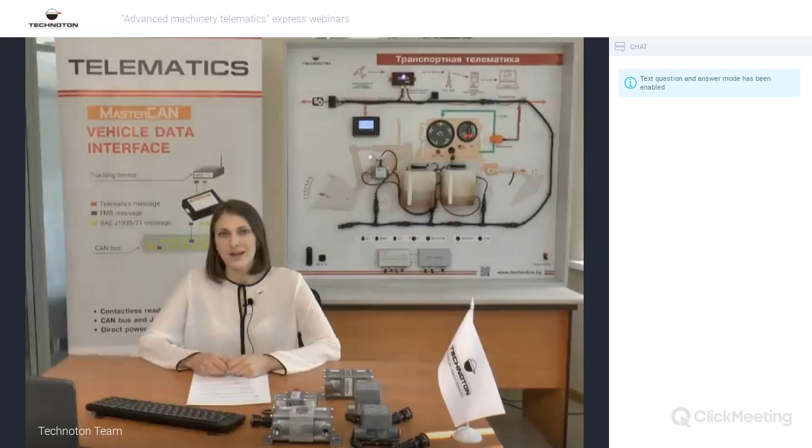Maybe you missed some previous webinars, so I will remind you. Technoton is a manufacturing company of fuel flow meters, fuel level sensors, axle load sensors, and other equipment in CAN bus. We continue our topic, and today I will talk about DFM fuel flow meters.

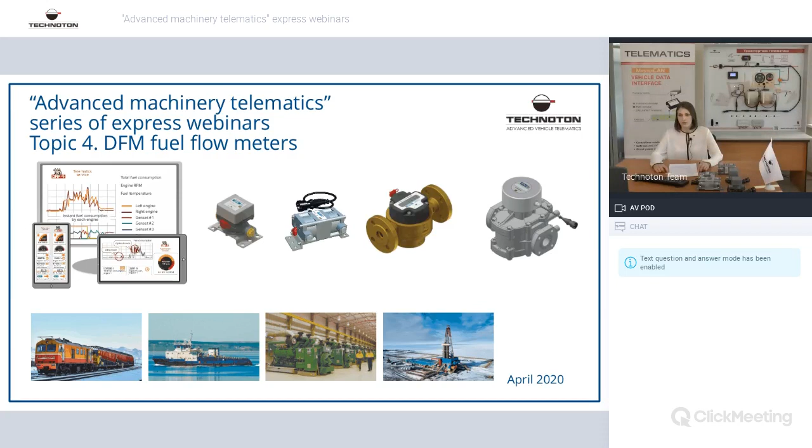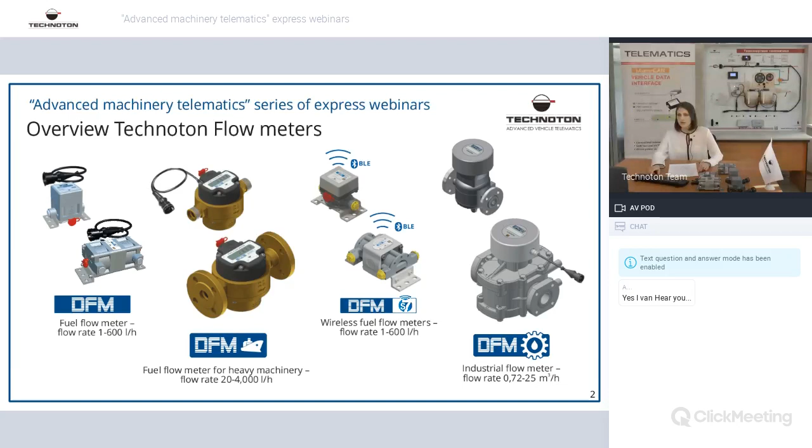I will talk today about fuel flow meters. On the previous slide, you can find the whole line of our fuel flow meter product lines. I will talk about the first part, small and differential fuel flow meters up to 600 liters per hour. But we also produce DFM marine wireless fuel flow meters, BLE, and also DFM industrial. About other lines, we will talk on Friday and further in our online webinars.

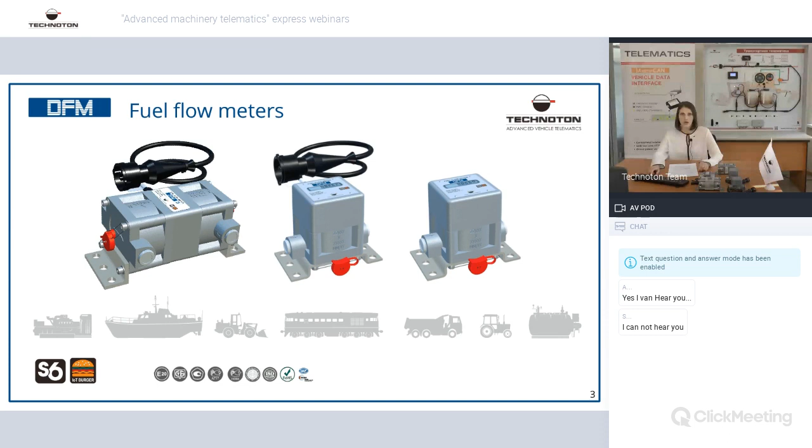Differential fuel flow meters and one-chamber flow meters here. It can be autonomous and with output interface: Pulse, CAN, Modbus, RS-232, RS-485, and others.

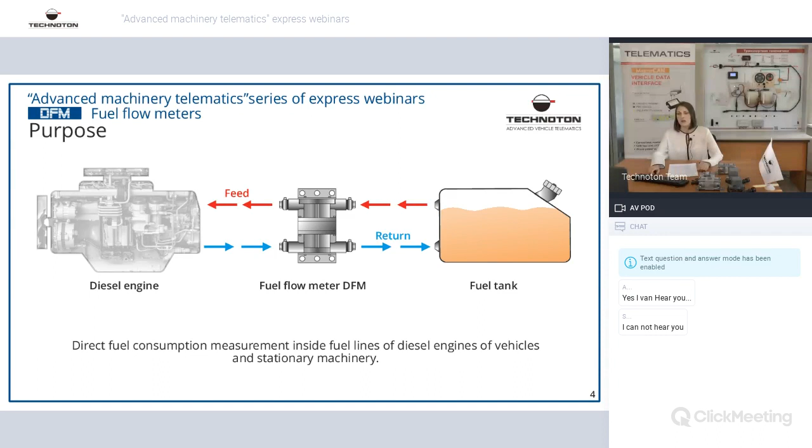The purpose of all fuel flow meters is to measure fuel consumption directly in engine lines, because the fuel flow meter measures the engine fuel line as a feed going from tank to the pump of the engine, and also the return line going from the engine back to the tank. Not mathematical calculation, everything direct from the engine.

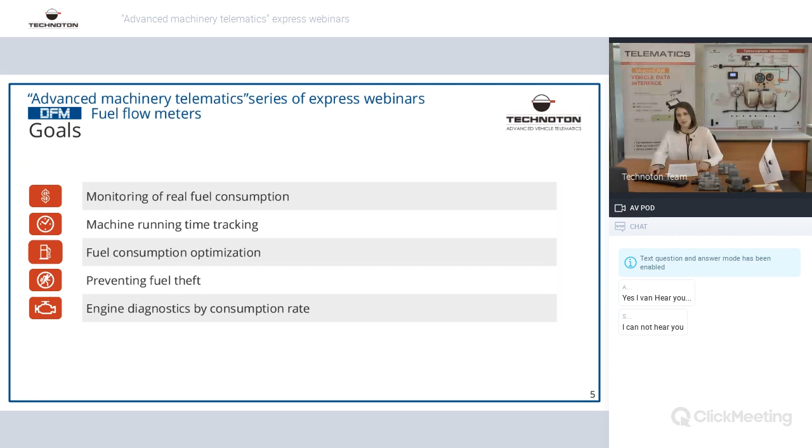The goals are to monitor real fuel consumption, machine running time tracking, fuel consumption optimization, preventing fuel theft, engine diagnostics by consumption rate.

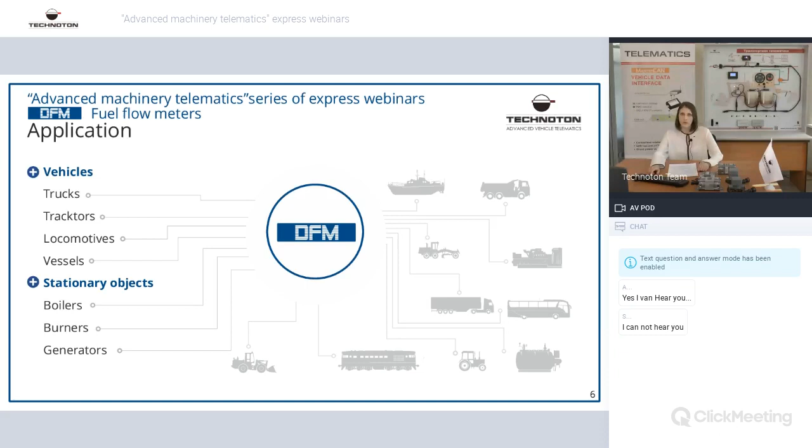Application of fuel flow meters you can find actually everywhere. Lots of cases: machinery, vehicles, vessels, all of them have diesel engines. Even on our website, you can find cases with descriptions where DFM is already installed in trucks, tractors, locomotives, vessels, stationary equipment like boilers, burners, generators.

Advantages of fuel consumption measurement - there are a lot of advantages, and for you as partners, a big opportunity to make sales and open new markets for your business. Direct consumption measurement in fuel lines of the engine means it's not a mathematical calculation like CAN bus auto vehicle data. Everything is measured directly from the engine itself.

Accurate data regardless of vehicle position and fuel tank shape. Really, for example in buses there are so crazy shapes of fuel tanks, and sometimes it's so difficult to calibrate accurately in order to get accurate data. That's why it's much easier to install a flow meter on the engine and get precise fuel consumption, and compare with fuel fillings and fuel thefts.

Even in position, for example in mining applications, when mining or construction equipment is working stationary without moving for a long time, fuel level sensors will not get and provide accurate data because the fuel level is not changing, but fuel consumption is changing.

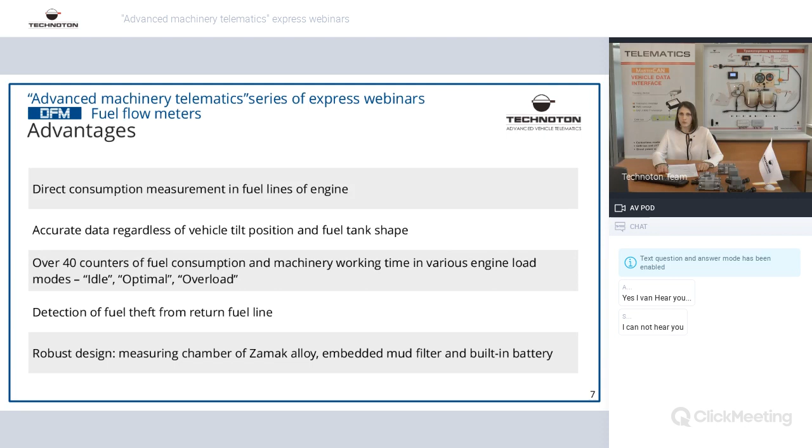Robust design, measuring chamber of zinc and aluminum alloy, also embedded mud filter and built-in battery.

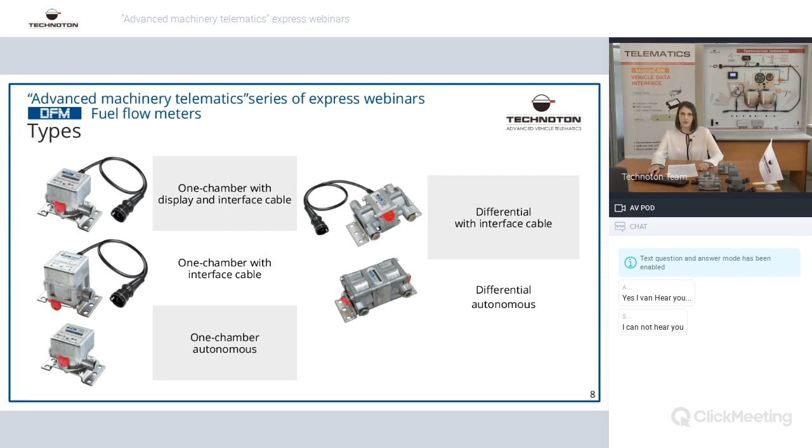Different types of fuel flow meters: one chamber flow meters with interface or without interface, with inbuilt display or without inbuilt display. Also differential fuel flow meters, as well as with interface and without, only with display.

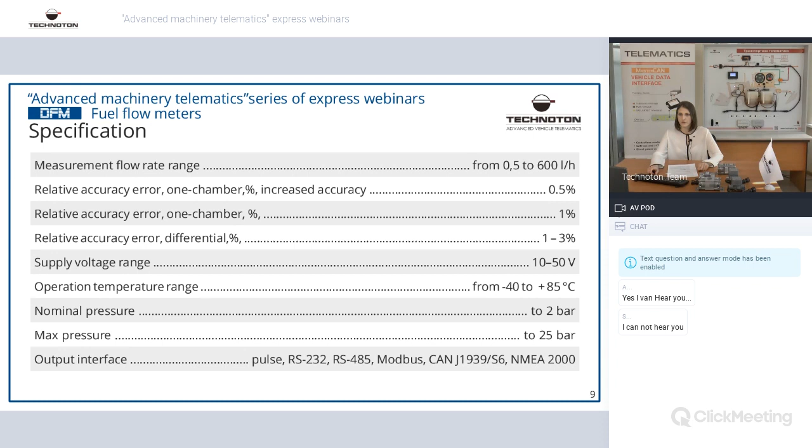How to order fuel flow meters according to identification codes. Not so difficult, I believe, for you, but I will explain a little bit deeper here.

X means fuel flow rates up to 50, 100, 250, or 500 liters per hour. Also available, 600 liters per hour.

Y means model without display, with display, or with display and extended functionality. For example, besides fuel consumption, you wish to see engine working hours directly on the display.

D and Z: D means differential. Z means interface - we can offer pulse interface, 232, 485, also including Modbus and CAN interface. I will talk deeper further about specification and advantages of different interfaces.

An increased accuracy version is provided with special letter U, and P means, for example, HP modes. It's with a higher fuel flow rate, up to 600 liters per hour. It's available for differential fuel flow meters.

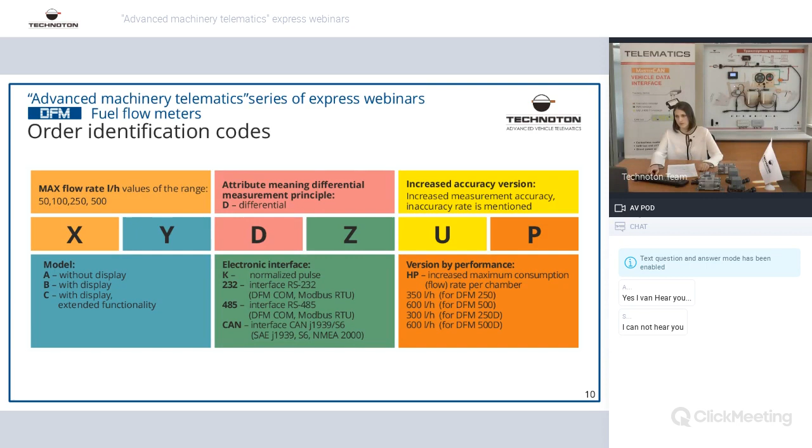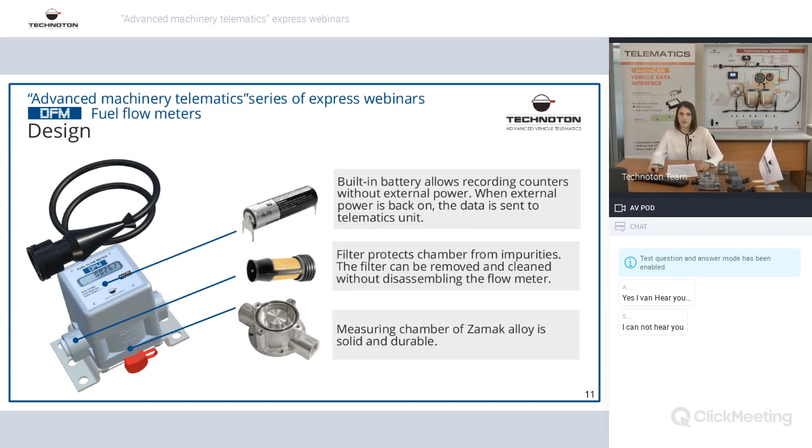Let's go further into DFM fuel flow meter design. We have versions with display and without display. Those models that have a display also have an inbuilt battery inside. All fuel flow meters have a mud filter that can be cleaned after it gets dirty. The measuring chamber is durable because of special alloys, covered with special material that gives durable working during the whole lifetime of the fuel flow meter on engines.

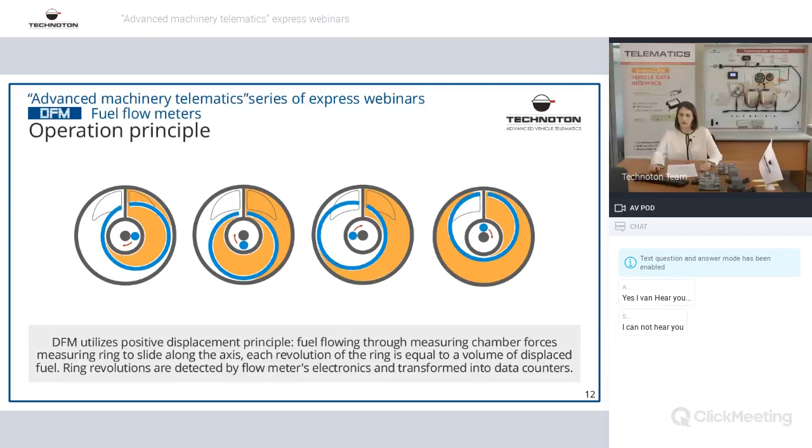The operation principle is pretty easy to understand. DFM utilizes the positive displacement principle - fuel flowing through measuring chambers forces the measuring ring to slide along the axis. Each revolution of the ring is equal to the volume of displaced fuel. Ring revolutions are detected by the flow meter's electronics and transformed into data counters. In simple words, it's a ring principle movement, not turbine or other specifications you can find in bigger flow meters, available in further webinars.

Technology S6 - we developed the S6 network, called by our brand S6. It allows connecting up to 8 flow meters into a complete line. Very convenient on a vessel, for example, or several generators. It's possible to combine all flow meters into one line only when using CAN devices. We even developed new functionality besides 8 - we can connect 16 flow meters into one line, meaning 8 or 16 engines will be functioning in one place, with one connection to power and also one connection to a telematics device by CAN port.

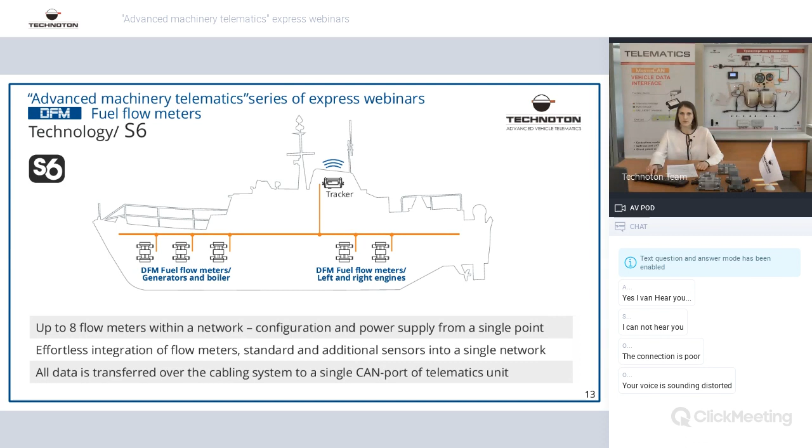Technology IoT Burger - probably you already know from previous presentation webinars that all our products are developed based on IoT Burger technology. It means onboard data processing, so all data is processed directly on the electronics of DFM fuel flow meters. 40 counters and even more are saved in internal memory and transferred over CAN signal to the telematics device.

Detection of interference and tampering, ignition on/off, and other events like errors are saved in a special journal, so you can see if someone is tampering with your device or interfering with the operation of the vehicle or DFM. Self-diagnostics and saving error codes in an events journal - those codes are also transmitted online via CAN interface to the telematics device, so there's no need to go on site to see what's wrong with the engine or fuel flow meter.

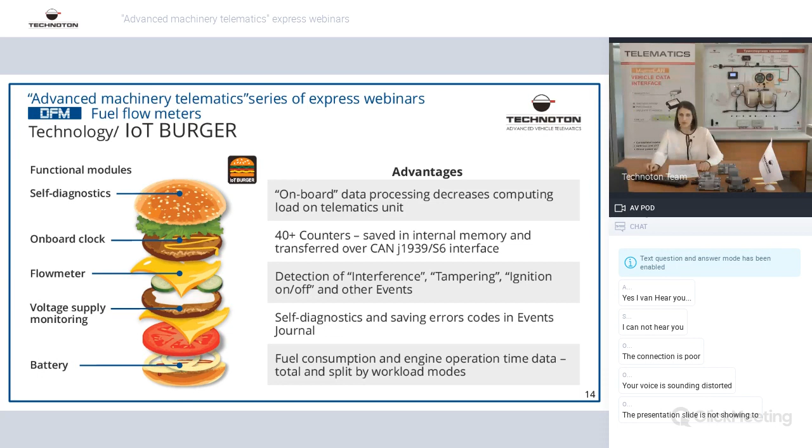You can see everything online. Fuel consumption and engine operation time data, total and split by workload modes - you can divide fuel consumption by different working modes, and operation times will also be divided into idling, optimal, or overload modes, plus modes like tampering and interference.

Going further, what we can find on the display of fuel flow meters - a lot of parameters, actually. Here we can see 14 parameters: total fuel consumption counter, engine operation time. I believe everything important to know about fuel consumption is shown.

Working hours - you can also see everything in high resolution data, and it's also clearable counters to see data per period of time or type of operation. At the beginning you clear, and at the end of the day or working time, you see the fuel consumption and engine operation time. Besides main counters that are saved all the time, there's instant fuel consumption and total fuel consumption during the whole work of the fuel flow meter.

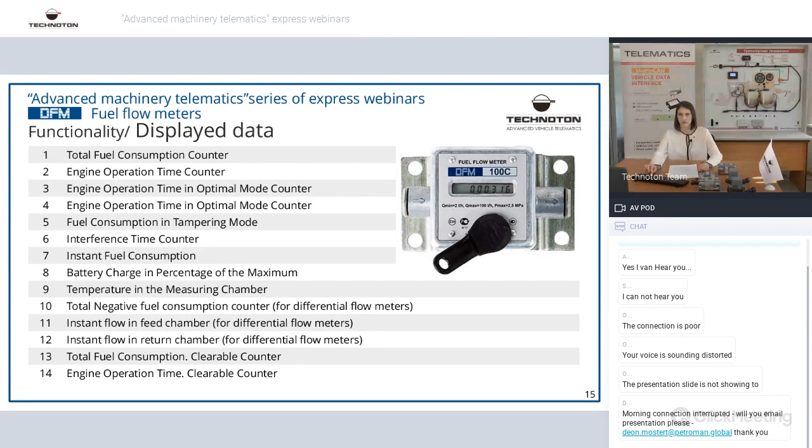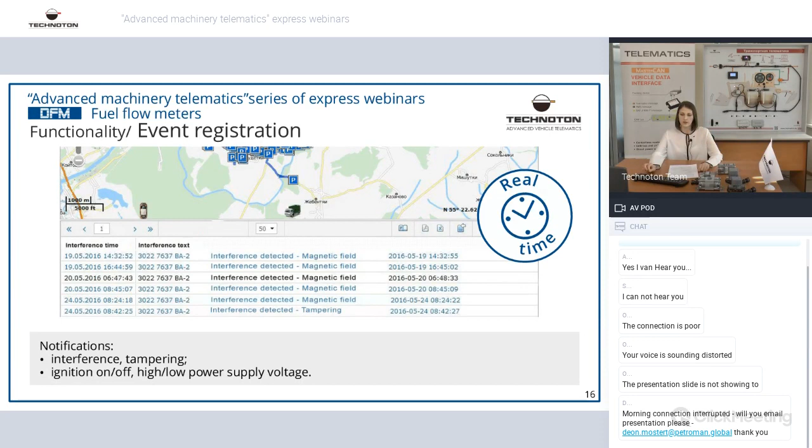Event registration, as I already said - if something goes wrong with DFM, interference occurs, or tampering or errors happen, DFM sees and saves events into its special journal.

Protection from interference - let's imagine what interference can appear. Interference with magnet: number and duration of attempts - this data will be provided by DFM. Tampering: artificial flow volume and duration of tampering attempt. Negative consumption: also artificial flow volume and flow duration through the return chamber. Those counters are saved in the internal memory of DFM, and if you're using CAN interface, it will be provided to your telematics device via CAN network.

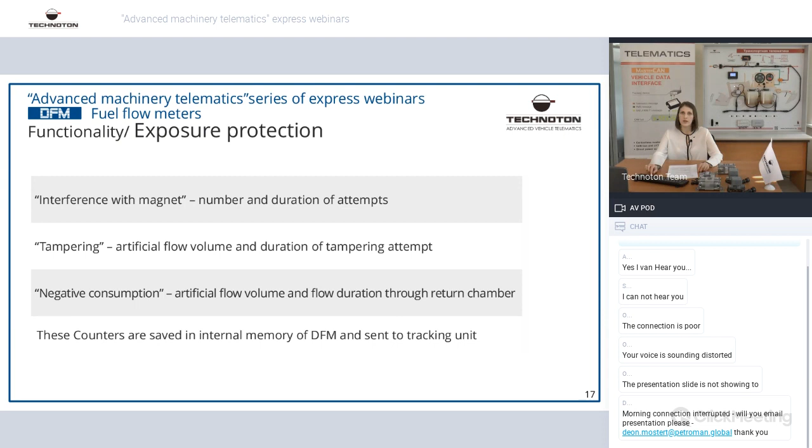How do fuel graphs look in telematics software? Of course every software has specific configuration, but if you create fuel graphs from fuel flow meters, it will look similar to this slide: instant fuel consumption, and besides this graph, total fuel consumption with green and orange lines, or maybe brown to someone.

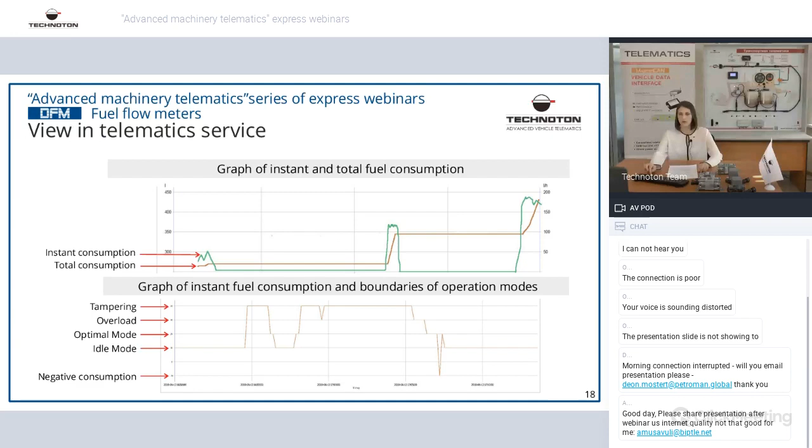As you are getting data about other modes like tampering, overload, optimal, or idling, you can create also graphs specifically for these modes of engine.

Let's compare some interfaces on DFM. As I mentioned, DFM fuel flow meters can be with pulse interface, RS-232, 485, and also CAN. In case with pulse interface, you will get only pulses. Based on pulses, you will need to calculate fuel consumption and engine working hours, so nothing more, and other parameters will be saved only in DFM itself.

To see them, you will need to get to site, attend with the service kit, and see internally the memory of DFM.

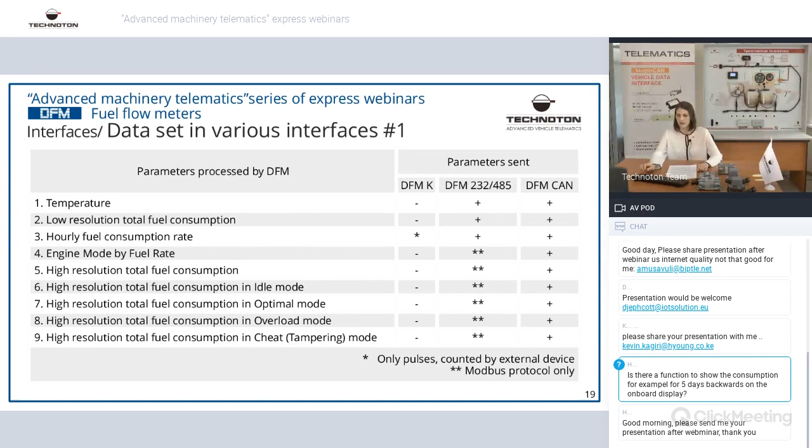But the most advantages are on CAN interface. Actually CAN interface provides all counters and all parameters online. Even though it's saved directly on the electronics of DFM, those counters are also sent and provided to the telematic device online. No need to go on site to see something deeper, even errors. It's very convenient.

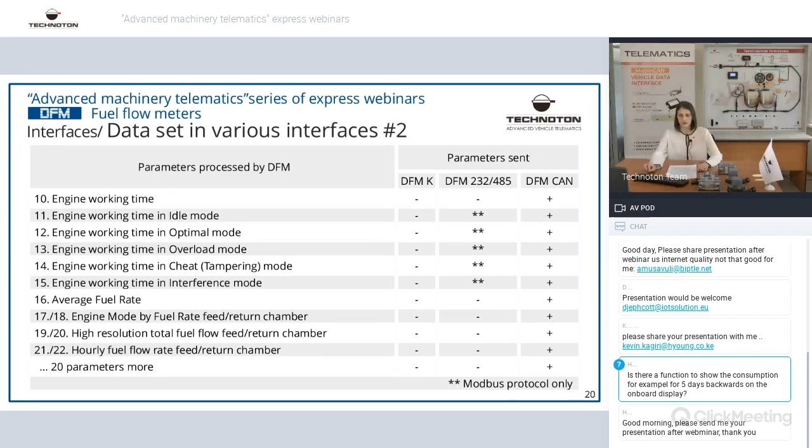And on CAN interface, it's also easy to integrate with new telematic devices. I will talk later at the end of this presentation about compatibility with devices.

Our product is a wireless DFM fuel flow meter. Interface is BLE, Bluetooth communication. Really convenient in installation and configuration. It saves time when you use it, you no need to use a cable.

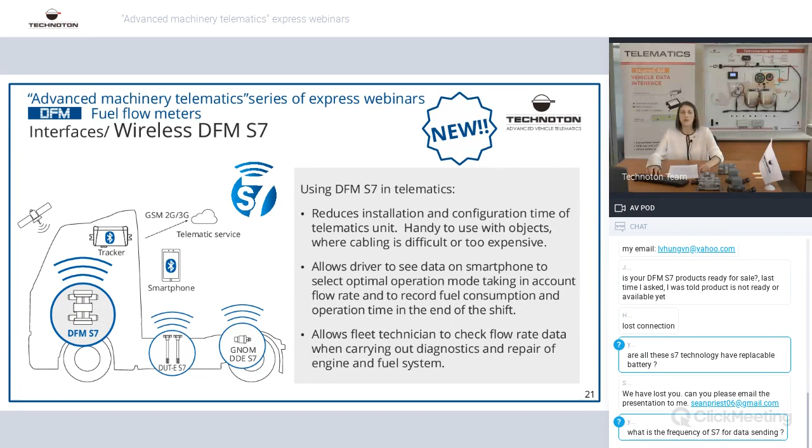It allows the fleet technician to check the engine and fuel flow meter easily on site. It means no need to connect a service adapter and connect to PC, upload a special program. You just connect with your tablet via BLE and see the fuel flow rates, counters, etc. on the DFM itself.

Selection according to high pressure pump: as you know, different engines have different pumps, and it's not easy, sometimes not possible at all, to install a one-chamber flow meter. In this case, you will need to install only differential fuel flow meters. I would say differential will work everywhere, and it's easy. Even on small or bigger engines, differential measures fuel consumption difference between feed line and return line and transmits to the GPS tracker.

But for example, on unit injector fuel system and common rail system, you will need only differential. It's not possible to install a one-chamber flow meter there.

In some old and simple engines, like with inline pump and distributor pump, it's possible to install a one-chamber flow meter. Sometimes it's lower cost than a differential flow meter, in case you are able to modify the fuel system.

When I'm talking about modifying the fuel system, it means you need to circle the fuel lines, so the feed line will not go back to the tank, it will go again to the pump. Fuel will be circling inside these small lines around the engine, around the pump. That's why it means you need to modify the fuel system, the fuel lines.

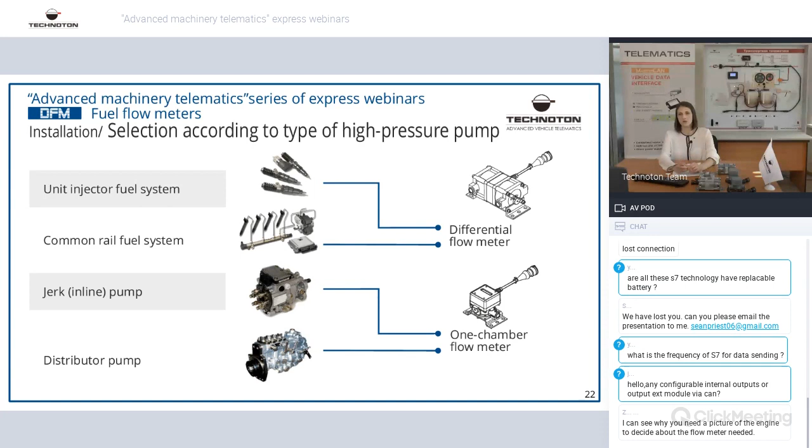Let's go further. Hope you are not tired of my talking.

About mounting kits, we provide different mounting kits specifically to DFM models, and we help find special adapters according to your fuel lines, because engines have fuel lines with different sizes and threads. Sometimes mounting kits are universal, sometimes not, but we do all the best to provide reliable mounting kits.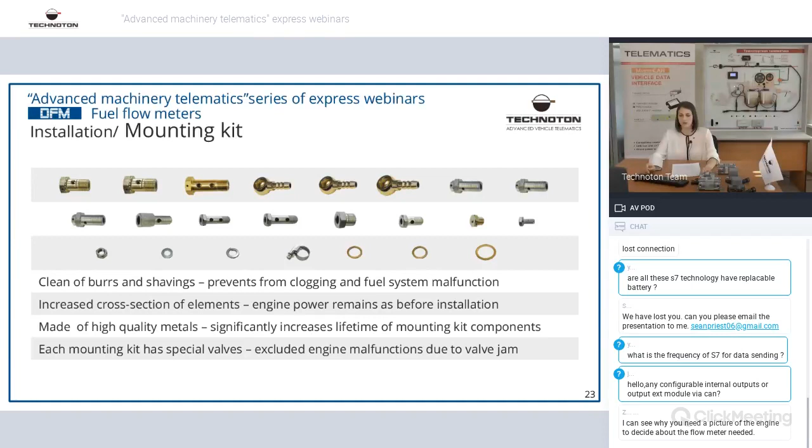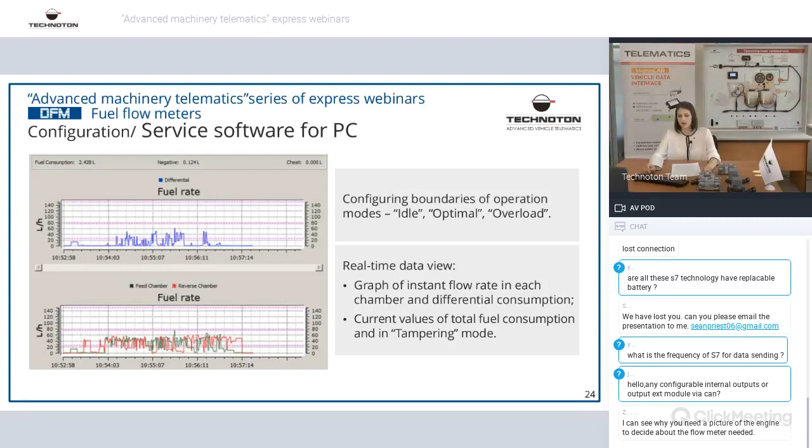It actually protects you from wrong installation. When you see no air bubbles and no crazy fuel lines on these graphs, it means the installation is done accurately and your customer will be satisfied with the functionality of the fuel flow meter further on. That's why at the beginning of purchasing one device, we always recommend using service software to protect you from wrong installations.

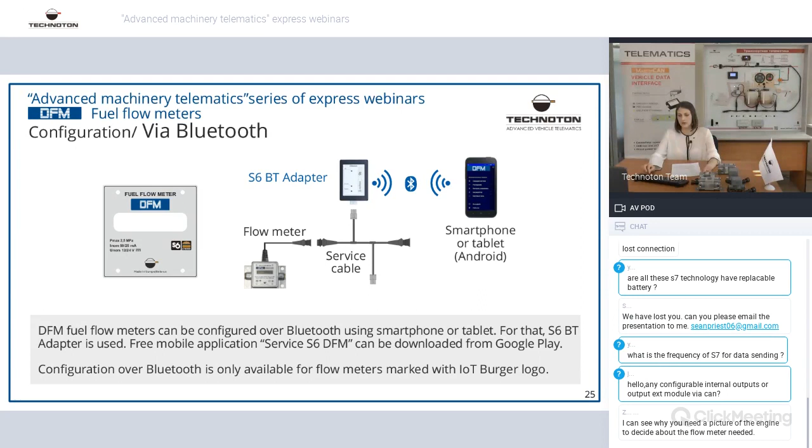Service kits can be with a cable connecting to a computer or with BLE connection — it's just a Bluetooth adapter to computer, or with a phone adapter, as you can see.

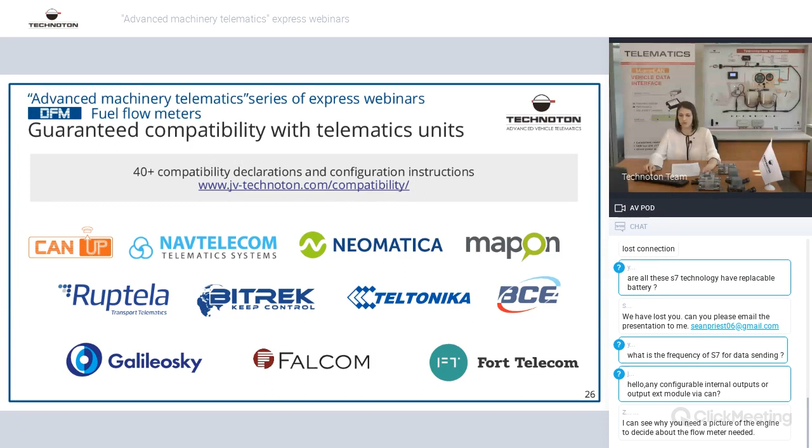Compatibility with telematic devices: lots of telematic devices you can find here already compatible with our products. But besides that, we can easily make compatibility with new devices based on CAN interface, because CAN interface is universal, based on the J1939 protocol, so new compatibility goes really easy.

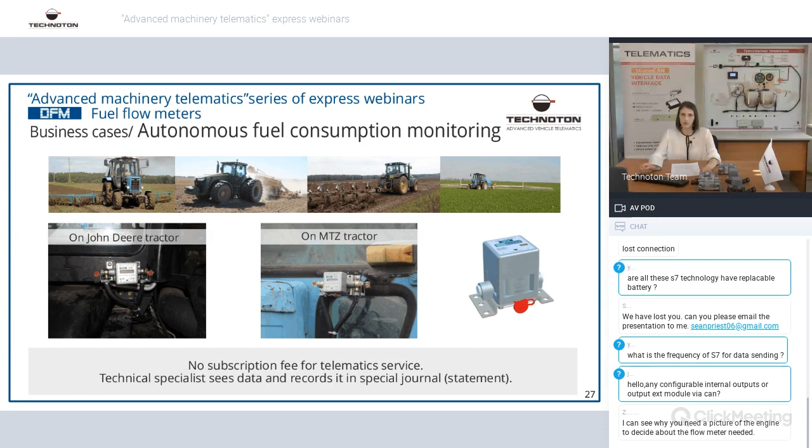Autonomous fuel consumption monitoring. Here you can find examples on tractors, John Deere and MTZ. No need to use even a telematics device — you can install an autonomous flow meter and see operation time and fuel consumption directly from the engine using a screen and magnetic key to switch from one screen to another to see the data. We call this seeing data offline.

When talking about telematics, you can use the DFM fuel flow meter in one network. For example, in vessels, you attach different engines and several fuel flow meters into one line, and on our software you can create a dashboard. We call it an online dashboard, and simultaneously you will see the running of several engines at one time.

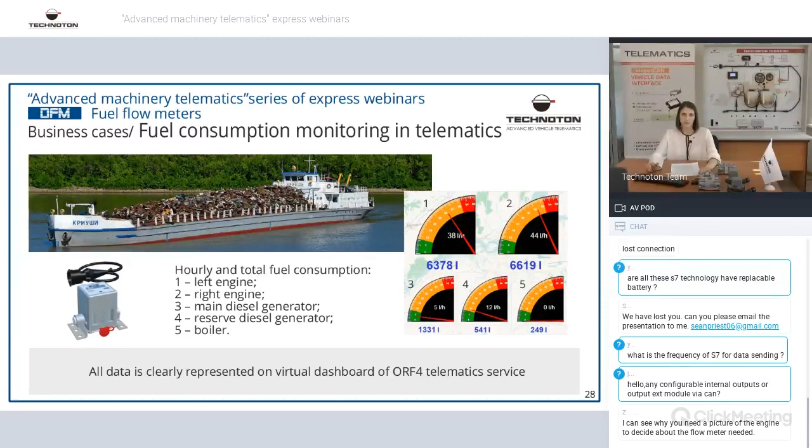So fuel consumption and engine hours are shown on one screen. You can see the green, orange, and red indicators on the right side of the slide. Of course, if you wish to see in reality how it looks, we will show it in our software. Even in the demo version some parameters are already available, but to go further for the online dashboard by managers, it can be done and provided to you as an example.

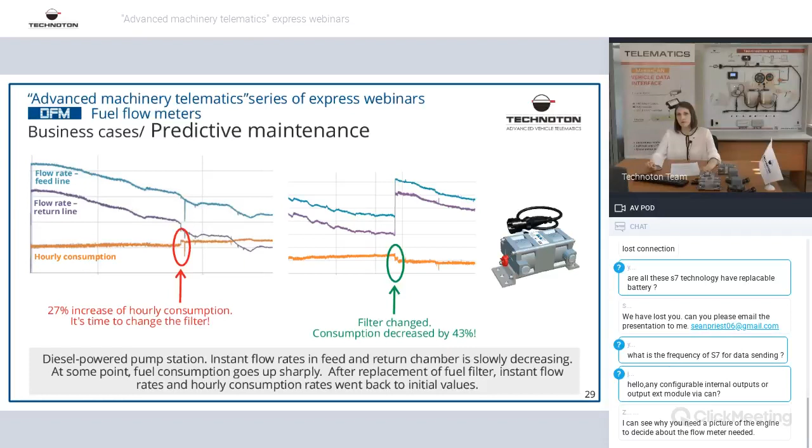So let's make a summary of our presentation. We were talking about accurate fuel consumption and engine operation time. With the DFM fuel flow meter, we can see total fuel consumption divided into different modes like idling, optimal, and overload modes, additionally with tampering and interference detection. Operation time of engine and fuel pump is also divided into separate modes.

Secondly, we were talking about protection from interference — all events are recorded by DFM memory, and some errors are provided online to the telematics device. We were talking about S6 networks that allow you to connect up to 8 fuel flow meters into one line, or even more — it was recently developed that our network now allows connecting up to 16 fuel meters. And of course, if you wish to add fuel level sensors, that's also available with the S6 network.

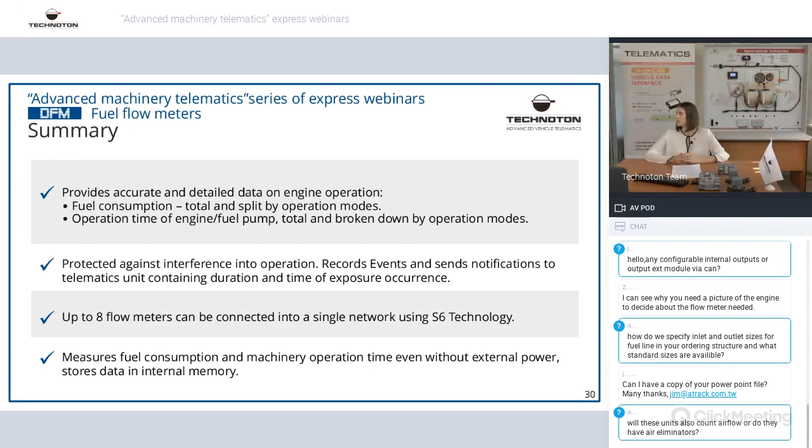Well, I believe that's all. Please pay attention to the last slide. Here are our different websites, and really, I believe there are lots of them.

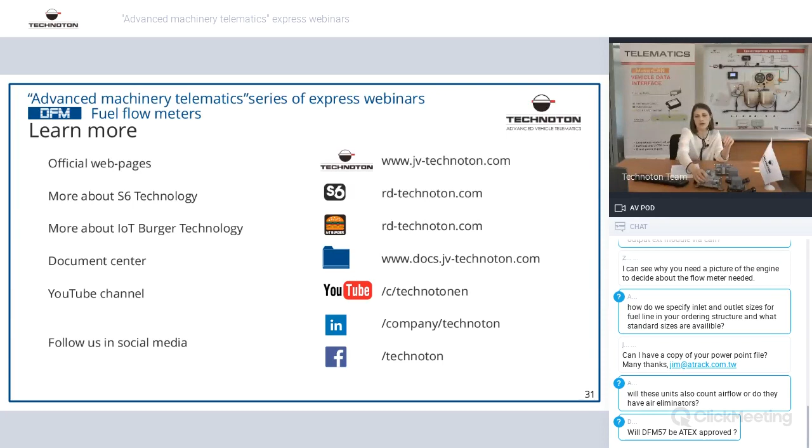Maybe I didn't show you fuel flow meters, for example how they look in reality. Wireless BLE fuel flow meters - I will show you just an example. A 3D view you will find on our website.

Small differential 100 with interface, and one chamber flow meter. It looks like this one. I believe you see it.

So let's proceed with your questions.

Is the Bluetooth battery replaceable? To be honest, I'm not sure how to reply accordingly on battery replacement, because we need to look at the electronics dashboard, and I'm not sure that it will be allowed to replace the battery itself. But I will talk to our technical guys and confirm it later about battery replacement exactly on the Bluetooth version.

Is there a function to show the consumption, for example for 5 days backwards, on the onboard display? Yes. Imagine DFM has a counter with total fuel consumption. Besides that, it has a counter that is resettable, or in the presentation it was said clearable. It means that at the beginning of 5 days you clear this counter and see fuel consumption data at the end of 5 days - it's like a 1 week functionality. But the main counter, total fuel consumption, will be saved as well.

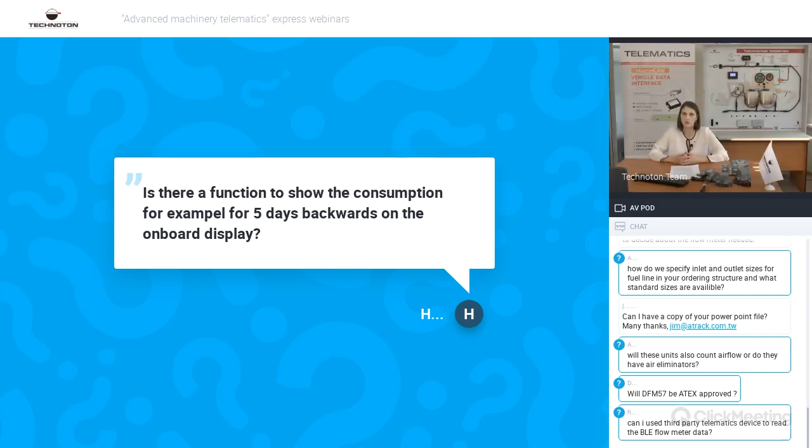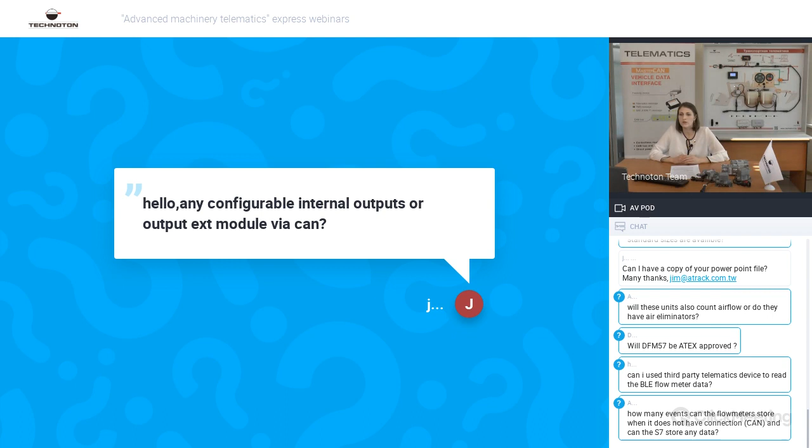Any configurable internal outputs, or output to an external module via CAN? Well, I don't understand this question clearly - probably we'll talk later more deeply with this guy, Jose. But I would comment that the CAN interface is universal, based on the J1939 protocol, and the output is also configurable. You can use messages and parameters as you wish, not all of them - there are 40 and more, even up to 3,000 parameters - but you can configure the parameters that you need specifically. Probably this question means exactly this about configuration, I believe. So we will talk with Jose later.

How do we specify inlet and outlet sizes for fuel lines in your ordering structure, and what standard sizes are available? I will comment and reply here. We have different sizes of fuel flow meters. Let's talk about differential fuel flow meters. One differential fuel flow meter is DFM 100D, 100 liters per hour, and the size of this chamber is 5 millimeters. Another type is DFM 250D, maximum 250 liters per hour, with the internal chamber size of 12.5 millimeters. The third type is DFM 500D, 500 liters per hour, with internal chamber size of 20 millimeters. Even on the DFM you find lines, for example feed line and return line, so it's easy to understand which chambers should be connected to the fuel lines of the engine. Not so difficult to mix up, I believe.

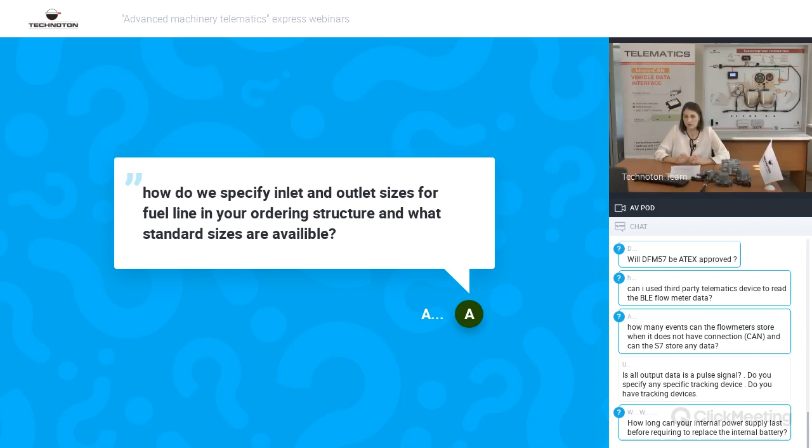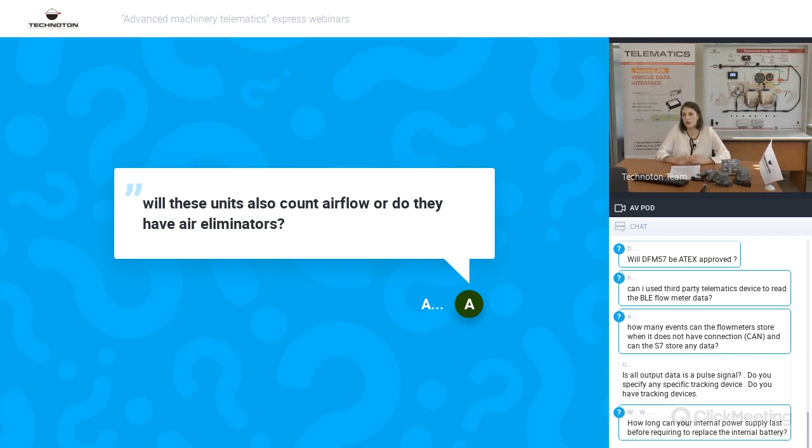Will these units also count airflow, or do they have air eliminators? In case air bubbles exist in the engine, you should connect a deaerator. This device is connected separately because there are rare cases when you need to install those deaerators. But you should understand that airflow shouldn't exist in fuel lines. If air appears in fuel lines, it will be obvious that the engine is working the wrong way, and air bubbles can even cause shutdown of the engine, or otherwise influence it. No air bubbles or airflow should be in the system. If you see this, use the deaerator separately.

Will DFM S7 be ATEX approved? We already approved fuel level sensors for explosion-proof wireless use - we talked about it in previous webinars.

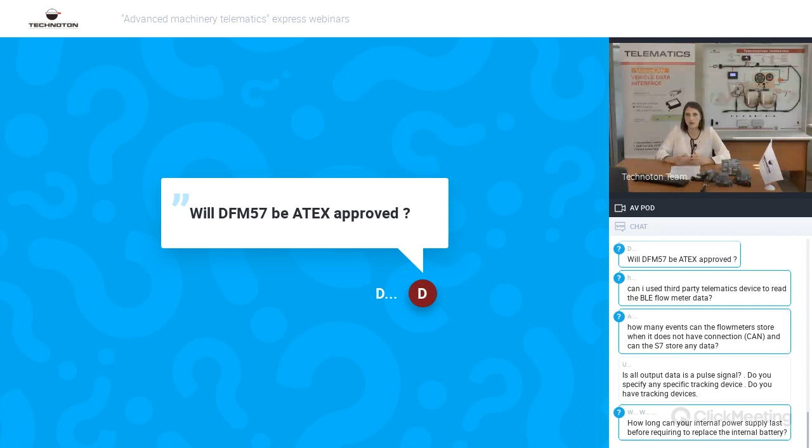We are working on improvement and documentation, ATEX also on DFM S7. As soon as it's released, we'll inform all partners about this document.

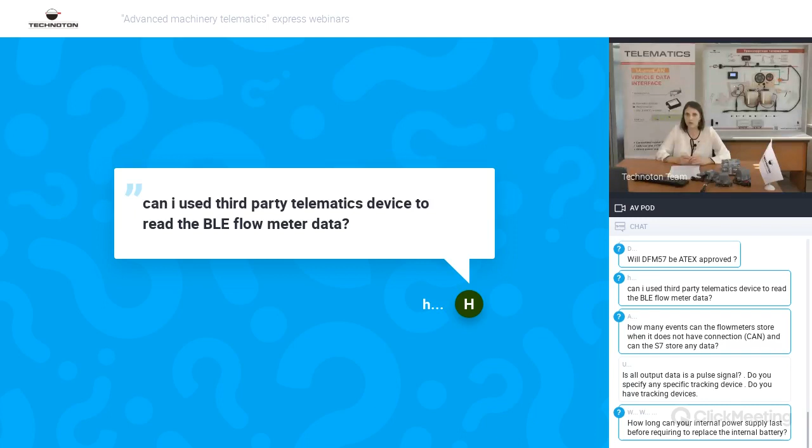Can I use a third-party telematics device to read the BLE flow meter data? Yes, you can. Depending on the interface, the third-party telematics device should understand our protocol, so preliminary integration should be done. We already did this with different third-party telematics devices, and it's not a difficult or long process. Once both units are configured and compatible, you can use third-party devices. The protocol is open, so you are welcome to make compatibility with our S7.

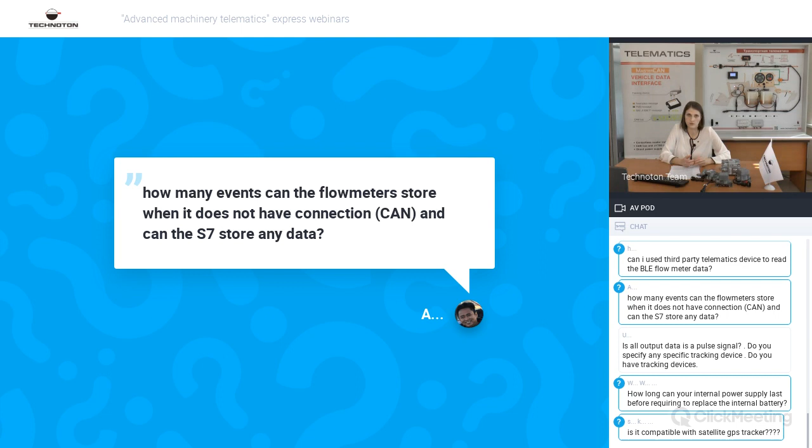How many events can the flow meter store when it doesn't have CAN connection, and can the S7 store any data? The flow meter itself, as I mentioned, has IoT burger technology, meaning all counters are inside the DFM itself. The question is only how to transmit it by interface. If it's CAN interface, you transmit all parameters. If it's pulse interface, those counters are saved only on the DFM, and you'll see them only on site using the service kit. When connection is lost, like if the CAN interface is lost, counters are saved in the memory of the DFM itself, accumulating data forever without any miss of data.

And of course, the S7 is the same case. How long can your internal power supply last before requiring replacement of the internal battery?

The power supply is durable. There is no time limit for the power supply if your power supply is the standard battery of the vehicle. So if the battery of the vehicle is alive, then you have power supply to the DFM. If you don't use the power supply, and we're talking about the internal battery, then the lifetime for the battery is 3 years. I believe that's a long time to have the DFM functional.

Is it compatible with satellite GPS trackers? Yes, it's compatible. You should understand that the connection between the flow meter and satellite GPS tracker goes via some interface, for example CAN cable, pulse, or any other interface, but then the GPS tracker provides satellite connection into the cloud, and satellite is the question of the GPS tracker. Compatibility between the GPS tracker and DFM is based on cabling, or S7 if it's already released, between both devices.

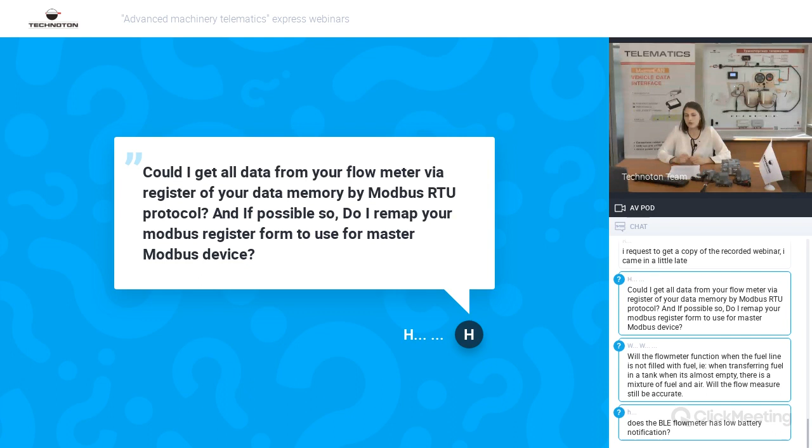Could I get all data from your flow meter via register of your data memory by Modbus protocol? Yes, you can. Modbus protocol is open. If you need, we will provide it, and you can make compatibility with your device and read the Modbus protocol. Can I remap your Modbus register form to use for a master Modbus device? To change the Modbus protocol is not possible. Development of our Modbus registers is done only by us, by our engineers. So you can just read and use it on your side.

Does the BLE flow meter have low battery notification? I'm not sure about this question, and I will transfer this question to technical support to get a precise reply about notifications.

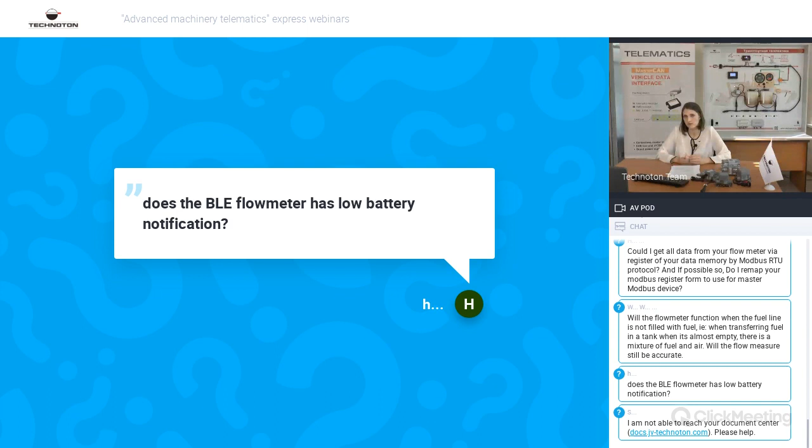Is all output data a pulse signal? Do you specify any specific tracking device? Do you have tracking devices? Yes, we develop and provide a complete system. We also have our own GPS tracking devices. And not all output data is pulse signal. As I mentioned, we have different interfaces: RS-232, RS-485, CAN, Modbus, besides pulse signal.

I can see why you need a picture of the engine to decide about the flow meter needed. Is that a question? I would say, if you need to choose the proper fuel flow meter, we will help. Even if you just name your engine, we will tell you what model you will need, so it's easy to understand and choose the flow meter model for your case.

Will the flow meter function when the fuel line is not filled with fuel? This means when transferring fuel and the tank is almost empty, there's a mixture of fuel and air. Will the flow measurement still be accurate? The flow meter will still function even if air is blown through the chambers, but of course fuel consumption will not be accurate, because air exists in the system, and it's difficult to understand the percentage of air versus the percentage of fuel for accurate fuel measurements.